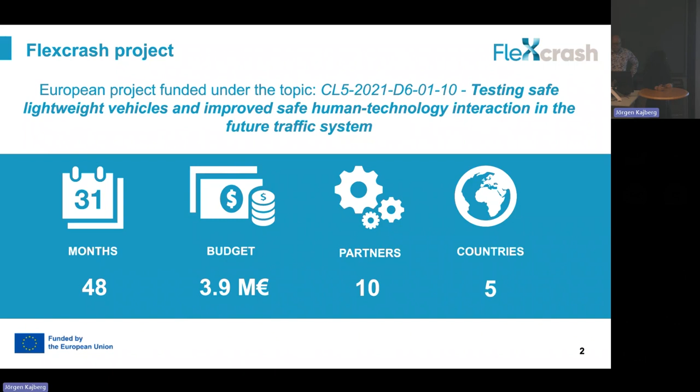So just a brief overview about the project. As I said, FlexCrash has been funded under the topic D60110, that is testing safe lightweight vehicles and improve safe human technology interaction in future traffic system. Our project is a 4-year project that received almost 4 million in funding, and our consortium is composed of 10 partners coming from 5 different countries. So here you have an idea of the structure of the main stakeholders involved in the consortium. We have 3 research centers, 2 universities, 3 industries, and 1 industrial research center that are really driving our decisions in terms of selection of technologies and materials, and 1 standardization body as a support.

So what is the motivation behind our project? First of all, we are trying to find more sustainable and lighter vehicles. Why? Because we need to support and to meet the greenhouse gas emission target of the European Commission, that is the reduction of 30% by 2030. But making cars lighter is super important, but we need also to make sure that they are also safe. And everything must be aligned with the European policies, mainly the Circular Economy Action Plan and the European Green Deal.

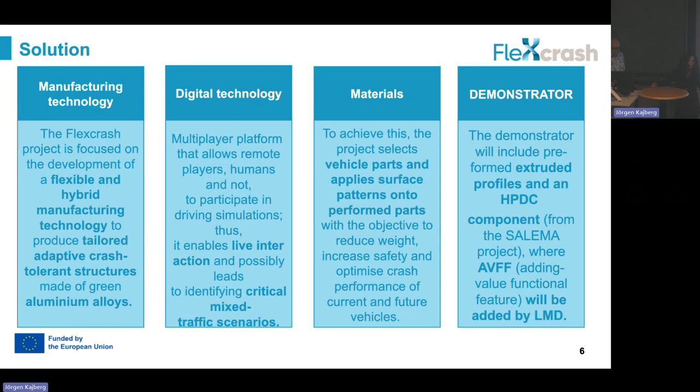So here you have the FlexCrash ambition. As I said, we want to develop low weight and circular cars, keeping safety and the reduction of injuries due to crashes, and also meeting the EU goals on zero emission. So what is our solution? Here I divided it into four main areas. The first one is the manufacturing technologies. Then we are also approaching digital solutions. We are working on materials, and we finally validate our developments in a demonstrator.

So speaking about the manufacturing technologies, here we are proposing flexible hybrid manufacturing technologies that support us to create tailored adaptive crash tolerant structures. Here, we use the pre-formed extruded profile and the high-pressure die casting component that is coming from a project that will be presented in the second session. And the added value functional features are added by laser metal deposition. Here you have a screenshot of our production process in Eurecat, and also a brief explanation of the additive manufacturing process.

So we are also proposing digital technologies. Here we have an online platform that allows different players to interact live, and this supports us to identify critical mixed traffic scenarios that can come in the future when we are going to bring lighter vehicles together with our

current ones. Materials. As I said, we want to make the cars lighter, so we are going for aluminum-based alloys. So here you have three different steps, because we are selecting aluminum because it's lighter, but also because it can be recycled. So when we are going for recycled aluminum alloys, we go for three different steps.

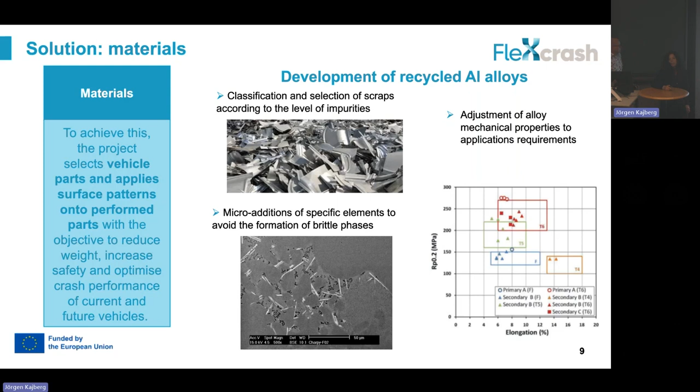So that's the selection of the different aluminum scraps, then the addition of specific elements in order to avoid the formation of brittle phases, and finally the adjustment in order to hit the mechanical properties that are needed for our scope. And here you have our demonstrator.

As I said, it is based on a pre-formed extruded profile that comes from SALEMA. And here we add by laser metal deposition some specific features, and our main scope is to make it lighter and also capable of responding to the crashes that we are testing.

So the project phases are mainly three. The first one is to collect the crash information through the platform that we have been creating. In that sense, this helps us to understand exactly which will be the most probable future crash. Then we are going for the development of the different materials and technologies. And finally, we will have our validation phase.

We are currently in our first year and a half, so the first reporting period, and we have already finalized the first phase, and we are already working on the second one. And we are happy to share today all the different details of the different topics I've been speaking about today with the next speakers. So thanks a lot.

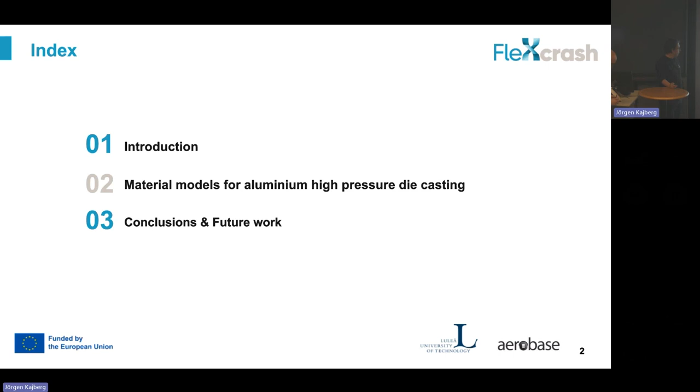And we're gonna talk a little bit today about advanced material models for crash scenarios. So I'm gonna start off with a brief introduction, and then Daniel is gonna take over with material models for aluminium high pressure die casting. And we're also gonna give some conclusions and future work in this project.

And this, of course, negatively impacts the European long-term climate goals. So we want net zero greenhouse gas emissions by 2050. And the transport sector is basically the only sector that hasn't reduced its greenhouse gas emissions since 1990. So this should be a huge focus area.

And also electric vehicles have these very sensitive batteries that you don't want to break, because you get really nasty fires. So lightweighting is still necessary, and we of course don't want to compromise crashworthiness. And here in the FlexCrash project, we use aluminum alloys, such as high pressure die casting, where you cast large lightweight parts, and extruded aluminum, and then you can use additive manufacturing to allow for low weight and optimize crash resistance by locally reinforcing critical areas.

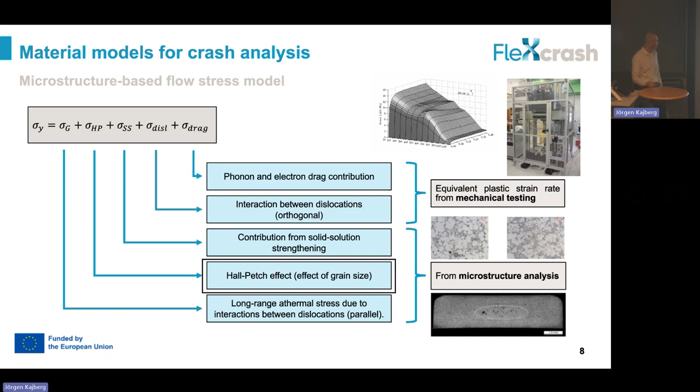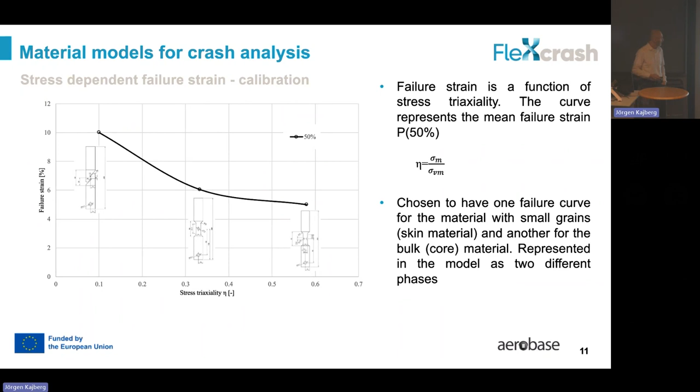So you need to create these failure curves. This represents the failure strain at that current stress triaxiality. And you need to take into account the microstructure. So in our case, it will be different on the outer layer of the component and in the internal part of the component. And another challenge is the variation in failure strain that we need to take into account.

So our hypothesis is that when you calculate your failure strain, because this is dependent. In a crash analysis, you don't have a constant stress triaxiality. It will vary, so you need to take care of that. But we do that, you can say, linearly.

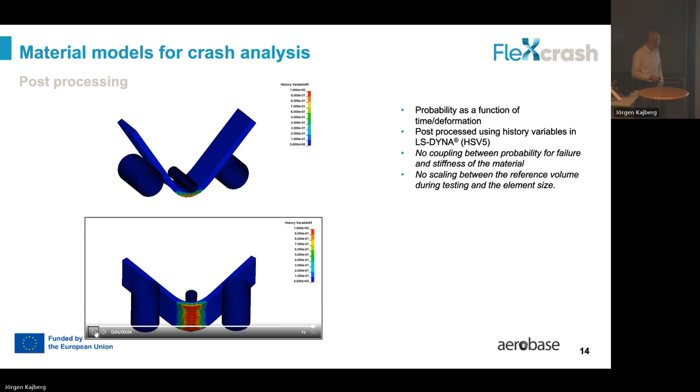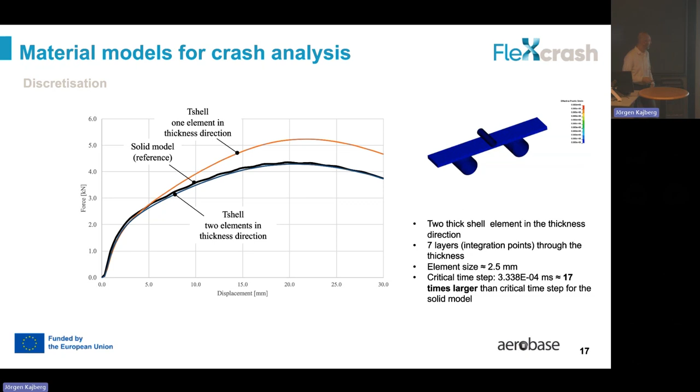Of course, when you do this discretization, you need to be accurate. So this example shows the force versus displacement. And as you can see, with one T-shell element through the thickness, we cannot really resolve the force displacement result. But with only 2 elements in the thickness direction, we can get approximately the same behavior as with the solid model. So if we talked about AM in the introduction, you can also introduce AM structures in this; we also propose here to use these thick elements for that.

So if you look at some of the conclusions, the probability model has been implemented. You need to include the stress state dependency. The standard deviation at different stress states can be taken into account. Thick shells are very efficient for this kind of structures, and we think 2 elements is enough through the thickness. And the next step and future work will be calibration of this model. So I think I will stop there.

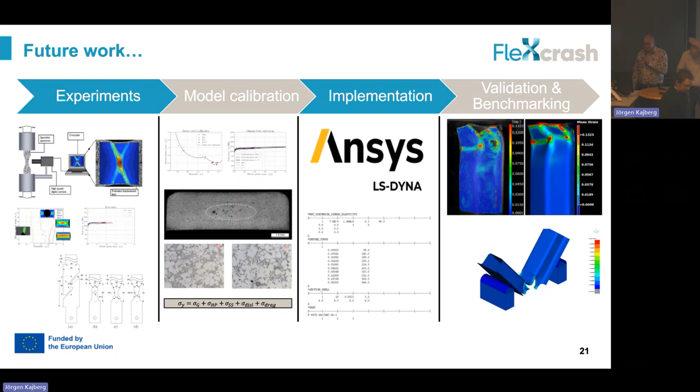So here today we will see the different techniques that we developed and that we will use in the FlexCrash project to characterize the materials in different situations, in case of durability, but also crash. So the main idea is to have different tools to assess the behavior of these materials, to design and also to select the best material for each application.

So the main structure of this presentation will be like, we will first address the vehicle lightweighting, so why it's necessary to reduce the weight of the vehicle, then the passenger safety, the vehicle durability, and finally the material selection, which strategy or how we can use this knowledge here to select the best materials for each application.

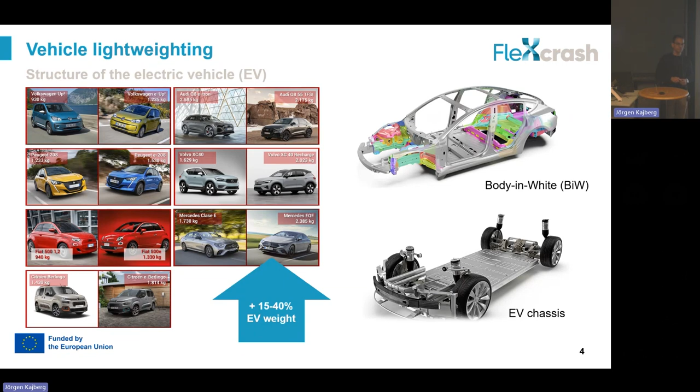So here then we have these different structures. We have the body in white structure, but also we have these chassis components that we can address in order to reduce the weight of the vehicle. So nowadays in all of these vehicles, we have this well-known banana curve where we have all of these different materials, high strength steels that are used to manufacture all of these different components. And I put here an example of the Tesla Model 3 where at least 171 pieces are made of different high strength steels.

But the trend is to use lighter alloys, so aluminum alloys, and also use the technology to reduce such amount of components into two big components, the popular giga castings from Tesla. So in this case, we are moving from almost 200 pieces to 2 pieces of aluminum. And this is not extraordinary. The main trend in the car industry is to use this technology, this giga casting. So you can see here all of the different brands that are using, planning to use, or investigating this technology to produce these vehicles.

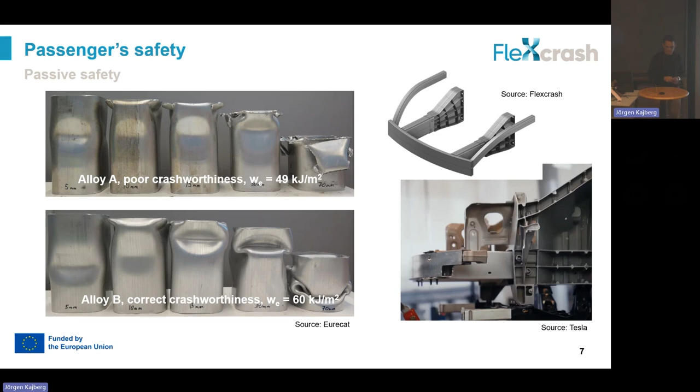And we want this behavior because it is when the material absorbs a lot of energy and we are constructing a much safer structure. And how can we evaluate or identify which behavior we will have? We can characterize this behavior by using the fracture toughness parameter. So here you can see the difference in energy required to crack the material. So then let's see the technique that we have started to use in the FlexCrash project to assess this fracture behavior of the component.

So here we are using this technique, the essential work of fracture, where we are testing different DENT specimens, these double-edged notch tensile specimens, where we have a different ligament length. So the ligament length is the distance between these notches with cracks, fatigue pre-cracks in the notch, and we test them until fracture.

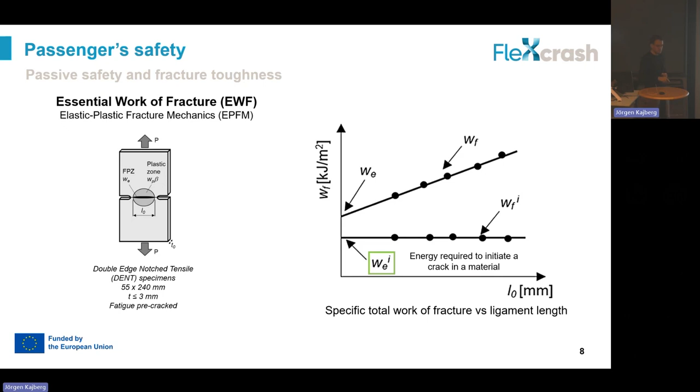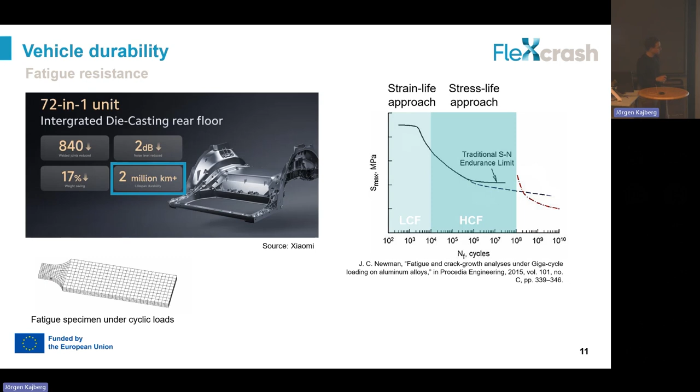And in this case, we have different strategies to select the best material for fatigue applications. The most known strategy is to use this SN curve, where we have different approaches: the strain life approach, where we have huge stresses, the stress life approach, the common one I would say, and the one most proper to characterize this fatigue limit related to a lot of millions of cycles.

And then we have the very high cycle fatigue. That's another stuff. But well, the point is that if we want to characterize or to get this SN curve for a given material, we need a lot of specimens, and also a lot of time, since only one specimen in this regime of millions of cycles takes from days to months.

And in this case, what we propose, and the main idea in the FlexCrash project, is to use this new test, the stiffness method. In this case, what we are doing is by only using one specimen, we are applying different fatigue blocks with an increasing stress amplitude.

And during this test, we are monitoring how the damage is evolving in the material. So we are doing this loading and unloading, and we are monitoring the elastic response of the material, the strain response of the material to a given stress value. So at the end, we can monitor how the damage is evolving from the start of the fatigue damage to the micro crack initiation and propagation, and finally to the macro crack initiation and propagation.

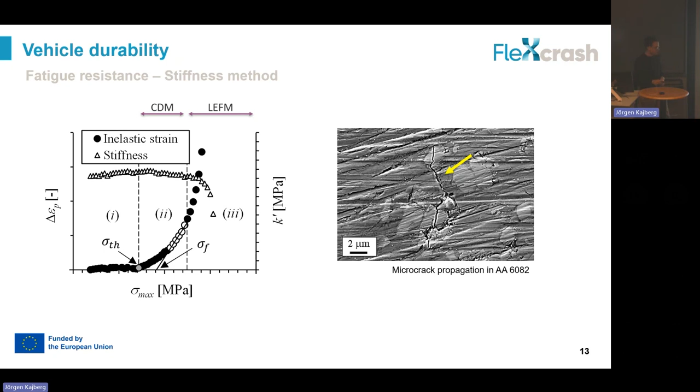This depends on the material, and so the damage tolerance of the material. This is one approach, but we can also use another approach where we define the fatigue limit as the first point that reaches the threshold, defined as 10 times the standard deviation of the first point. So this is just a tool to rapidly assess this fatigue limit value.

Then we can also use the same data, but in this case we are just switching the axis, and by applying these general formulas, we can obtain a first approach of the Wöhler curve, defined by using only one specimen, to get the fatigue limit and a first approach of this curve for these different materials.

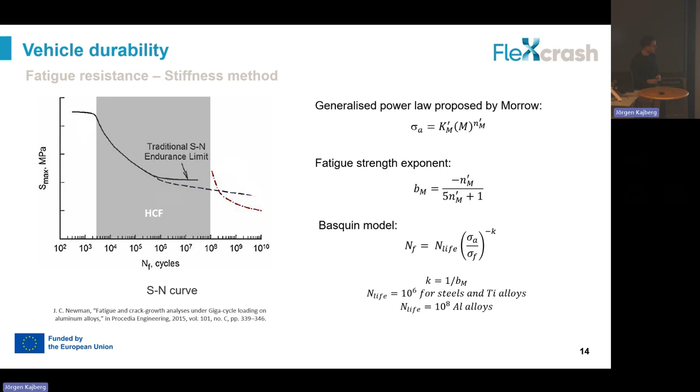And the good point is that this tool allows us to assess the fatigue behavior in a lot of different conditions, with different materials, but also with different features in the surface or different roughness conditions, and then select the best material for each application.

In fact, this is the main aim also of the FlexCrash project, to propose these new techniques to select the best materials for these applications.

So this is all from my side. Thanks for your attention, and I hope everything was clear, and I'm happy to answer questions afterwards.

Thank you. Thank you very much.

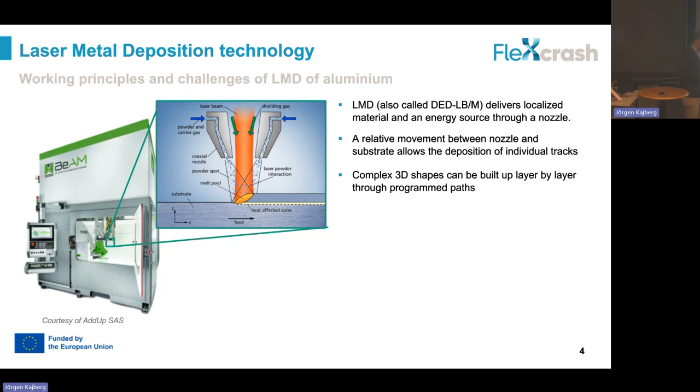Going more into reinforcement structures, of course reinforcement structures are not something new. It's something that is already done, especially in the aerospace sector for many years, because there we need to have high stiffness or high strength components with very lightweight, in order to save fuel to go to space.

Development of the process parameters: in our technology, we have three main parameters, because we need to control the amount of material, the amount of energy that we put into the process, and the speed at which we do this. So the three parameters we want to control are laser power, speed of movement, and the amount of powder that we feed through the nozzles.

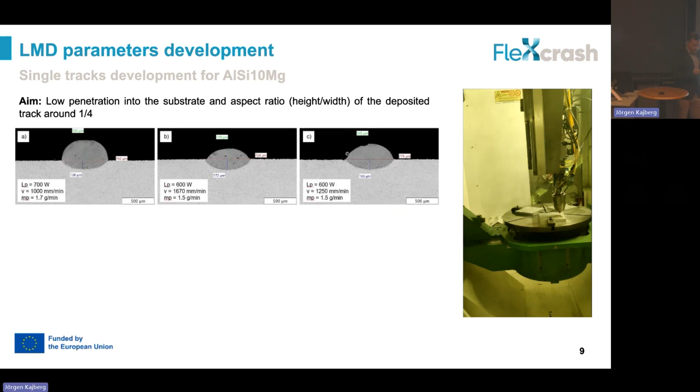From the design of experiments analysis, we can understand the influence of each parameter on the shape of the tracks we deposit. You can see we have a very different impact from each of the process parameters on the shape. For example, speed and amount of material fed through the process have a strong influence on the height of the track, while the laser power has mainly an influence on the width of the track. But very important for this project is the amount of substrate material that we remelt to create the melt pool on top.

Working with aluminum is quite challenging because when we deposit single tracks, everything looks fine and we have nice depositions. But when we try to build higher walls, aluminum has a very high tendency to overheat. This creates balling effects, where the molten metal solidifies in this type of balling along the deposition of the track. Also, due to heat accumulation, the melt pool takes a longer time to solidify, so the molten metal has more time to spread, ending up in wider and thinner layers every time we deposit.

With the close-up of the deposition, we could notice already from the beginning that the first track we deposit on the substrate is quite thin, but from the second track on, we had this effect of the tracks getting thinner and wider.

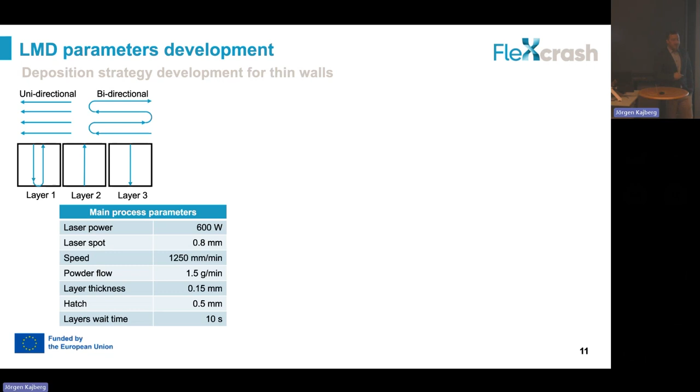So we went further to optimize this, trying to have this pyramid shape at the base of the wall that we deposit. And we found out that the best strategy is to have 3 tracks in the first layer, 2 in the second one, and 1 further on.

In order to be able in the future to design not only single walls, but also crossing walls, where maybe from the simulation we will see that this type of crossing walls can achieve a higher energy absorption during the crash of our components, we also have to optimize the deposition strategy when we have this type of crossing walls.

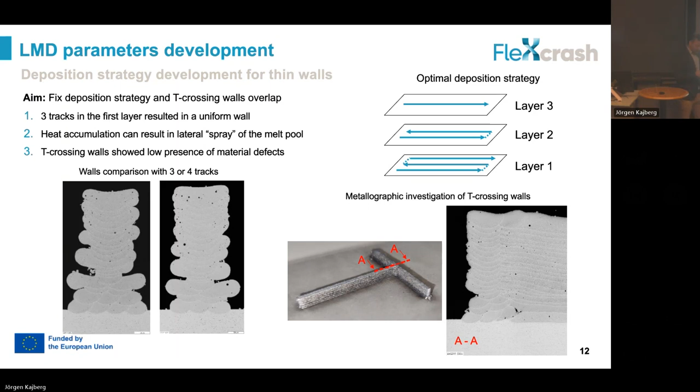So the last step and what we are currently working on in the project is the specimen manufacturing, as it was presented in the presentation before, and the first trials that we are going to test to characterize the material we deposit. So now we used 1.5 millimeter thick substrates. And here, as you can imagine, it's really important what I said at the beginning, to control the amount of material from the substrate that we remelt, and to avoid cutting or going through the thickness of the material. And our aim now is to test this material with a 3-point bending test.

Therefore, in this case, we cannot deposit samples following standards for material testing, but we more or less have to create our own testing strategy to characterize the material and have the material properties that will be used in the simulation to get the final shapes that we want.

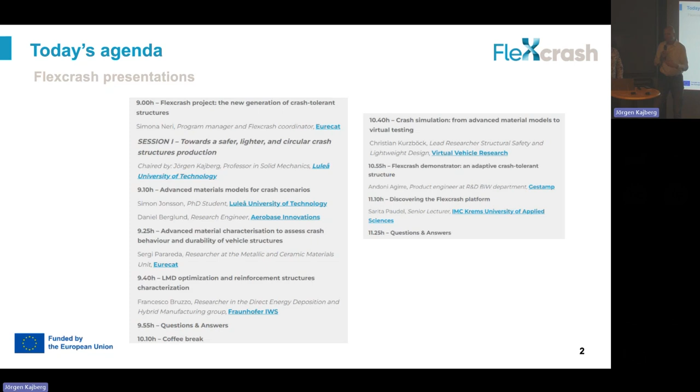Just to add also about the model itself, why have we developed a new model? One reason is that we need to have it microstructure dependent, and in the future we will import the initial state from maybe a CFD analysis. So we have the pore density. We get the variation of that, because now we test the material only with a certain defect density. So when that changes, you need this mapping.

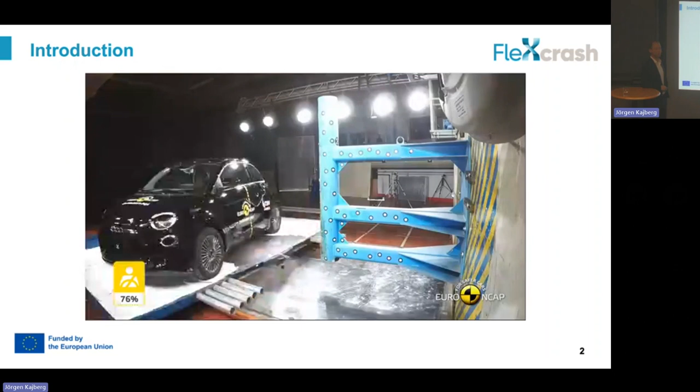So this is our daily work, crash testing, different cars, different scenarios. And now a question for you. What do you think one of these tests costs, one scenario with one car in the real world? Any suggestions? 100,000, 500,000? One of these tests costs up to 1 million euro for one scenario, for one car.

And car manufacturers all over the world have to fulfill a huge amount of different tests, approvals, and certifications. So when you want to bring a new car to market, you have to pay a lot of money just for testing. That's what we are working on, because we want to reduce these real tests in the development process and get a virtual validation, virtual testing, and in the end, a virtual homologation of the whole car.

So why are we not going fully virtual? Actually, it works. We can simulate, we can predict the behavior of different materials, of different components, up to full vehicle simulations and full vehicle behavior in different crash scenarios. But the first starting point is what Simon and Daniel mentioned before in their presentation. We have to understand the materials.

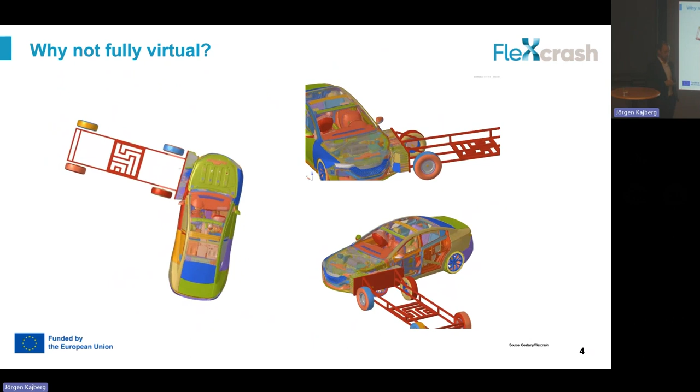So we have to know what the material is doing in certain load cases, in certain crash scenarios. So we are typically starting with Young's modulus, with density, with the base material properties. Then we are adding some stress strain curves, some plasticity. So that's the base work, for example, for metals and for different alloys. It's quite easy. The next step would be to add some strain rates. Different materials have different strain rates, so we have to add them to predict the crash behavior in different load cases.

The next step would be failure and damage from the material and also from connection points. So connection between different materials, different connection technologies. There are up to thousands of different connection points in a virtual simulation. And you have to predict every single point correctly to predict the crash behavior and the energy absorption correctly.

And the last step that we are working on actually, and also in FlexCrash, are these production-related properties. Especially for high-pressure die casting parts, the production process massively influences the material properties. And we have to predict these material properties and the behavior of these properties in a certain crash scenario.

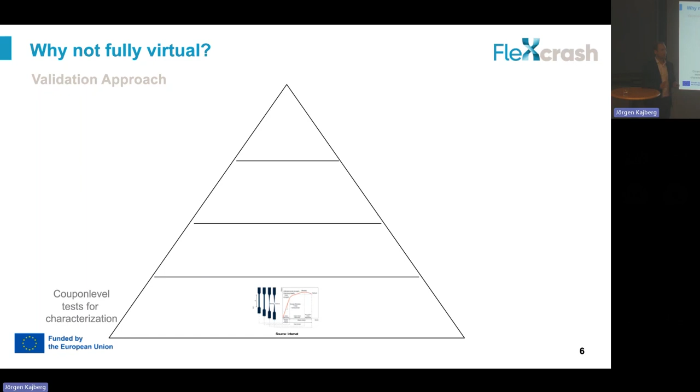So how are we doing that? We are starting at the base level, coupon level testing for characterization. Some of you know that. You test some coupon levels, you get some data from that. You use that data to validate your material models. You fix some issues. In the end, you have a material card you can simulate on component level.

So with this component level, we are going into more complex testing situations. We validate our material cards. When we have some issues with the material cards, we can go a step back to the material model calibration, modify in certain ways, use another material card, use other methodologies, other element formulations, and try to modify our simulation purpose and get a new model on the component level.

And after we have fixed all these issues, we can use that material card in a full vehicle validation. In a full vehicle validation, the complexity is increasing quite high. So we are reducing tests and we're using even more simulation for that. And what we are trying to do is to enhance the forecast quality with every step to predict the behavior of the full vehicle in different crash situations, crash scenarios.

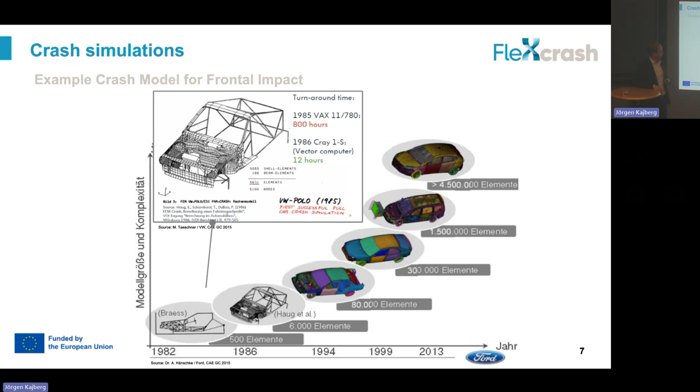And typically, we are using for these full vehicle simulations shell elements from 3 to 10 millimeters. But for these high pressure die casting components, we are going typically to solid elements with element lengths of about 3, perhaps sometimes 2.5 millimeters, to reach the given time step from our project partners.

So what are the requirements for these full vehicle simulations? It's not only the material card we are working on, we also have some other issues in the full vehicle simulation. We have airbag deployments, we have inflated tires, which have to be simulated correctly. We have connection failure. I said before, more than 1,000 connection points in a car, which have to be predicted to give the right energy absorption and the right deformation of these crash areas.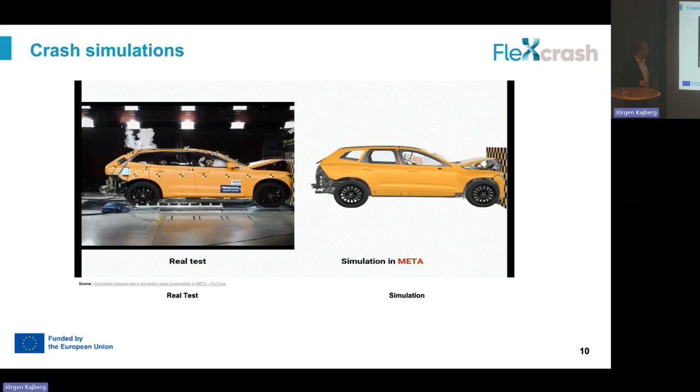But what we also do in FlexCrash and in other projects is to go from this quite defined scenario to new crash scenarios. So this is also one point in FlexCrash. We want to define new crash scenarios for future mobility. And this could be, for example, turning accidents or real world testing, where we have two different cars moving and crashing. So it's quite difficult to really test that on a test bench, because when you have two moving cars, it has to be defined exactly where they hit. In the simulation, it's quite easy. And when we are predictive enough, we can virtually test, virtually validate, and in the end virtually homologate cars and are no longer restricted to physical tests in the real world.

So to summarize the requirements: we need credible and reliable models. We need a standardized procedure for how to document these results in different solvers, in different material cards. Everyone has different internal papers on how to model such things, and that has to be standardized. What are the benefits? Faster product development, cost improvement, higher safety standards when all of these are standardized. What do we need for virtual validation? It should replace real world testing, not all, but most of it, especially when it comes to full vehicle simulations.

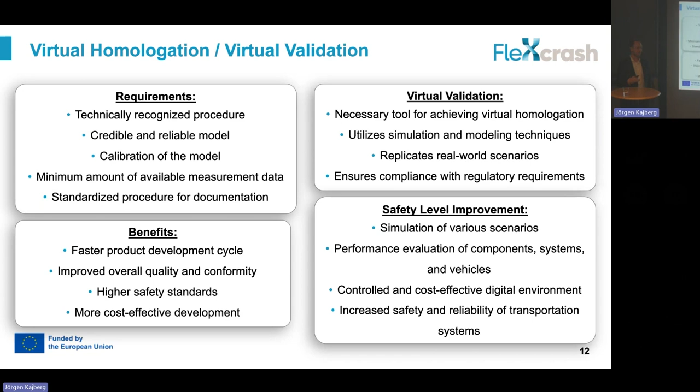And what are the safety level improvements? We can simulate various situations. We can simulate whatever the government, US NCAP, or Euro NCAP is asking for, and you can be sure that the cars will be safer with this virtual testing and virtual validation, because it tests more realistic scenarios compared to the current quite restricted and well-defined crash scenarios.

And virtual homologation, I think, for our company is the right way to develop and manufacture new designs and new cars, lighter cars, and to have more safety features and safer cars in the future for all of us.

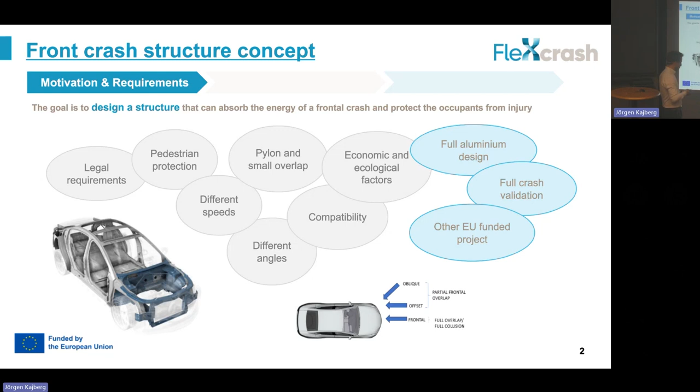Another objective for us was to perform the virtual validation, not only at component level, but also in full vehicle models. So this is another requirement. And finally, since this FlexCrash project is a project funded by the EU, we also wanted to create some links with European projects to create some synergies for the present and also for the future. So we have seen the motivation and the requirements. So then we had to define the tools. What are we going to use to define this demonstrator?

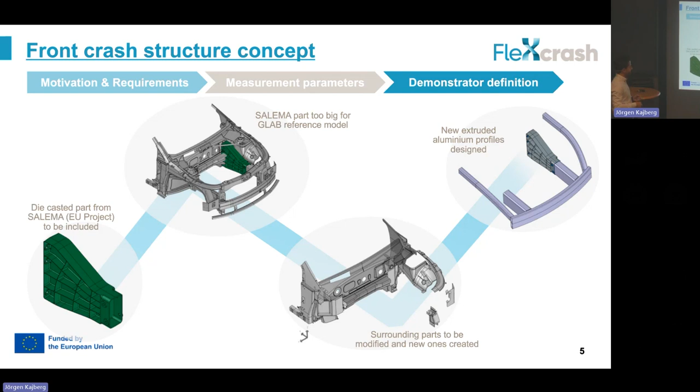So we put together this design, and we saw that it was not working so well. This is something we could expect, because usually when you design for crash, if in the first iteration you have a good performance, it means you have been quite lucky. So unfortunately, we weren't so lucky.

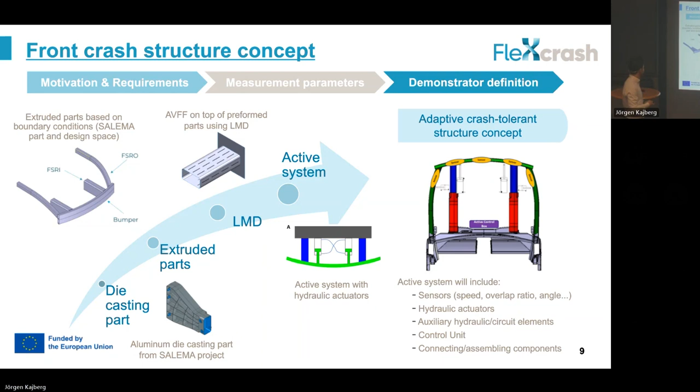My name is Sarita and I'm from CREMS. I'm going to introduce the FlexCrash platform.

The idea behind developing the platform is that developers, regulators, or other interested parties can play around with the vehicles. They can study the live interaction of human drivers and autonomous vehicles so that we can identify critical scenarios and avoid them in the future. The platform implements an online turn-based multiplayer game. It is a web-based application which uses REST API so that we can integrate autonomous vehicles easily with the features using different technologies, and also for scaling - so that we can create many scenarios, simulating many scenarios with many autonomous vehicles as well as human drivers. So this is the idea behind the platform.

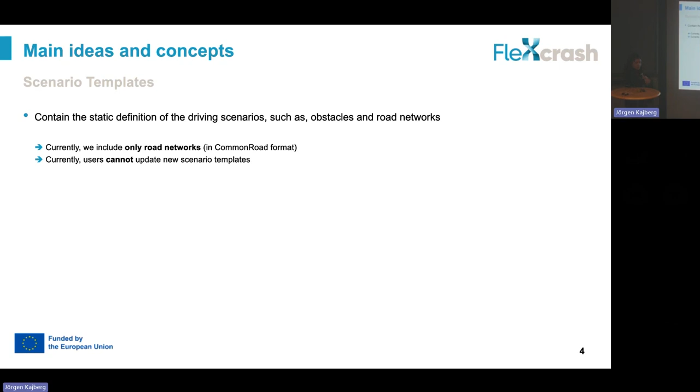After we have this template and create our scenario using it, we then have to drive the vehicles. How long we want to drive the vehicles is defined while creating a scenario. We need to define some time in seconds so that we have simulation steps depending on the time provided while creating the scenario, and we involve one or more drivers or one or more autonomous vehicles. That means we have human drivers and autonomous vehicles in the scenarios. Currently we have only one AV implemented.

We need to have the vehicles and the target of the vehicle - where does a vehicle want to reach? With 2 lanes, we need to keep vehicles in both lanes so that they want to reach in the opposite direction. We have some positions, rotations, and speed. From an initial state, we can control these parameters so that vehicles have a destination target position, and we want to drive the vehicles without colliding, staying within the road rather than driving off it. The platform then maintains the state of the driving scenarios and monitors their execution.

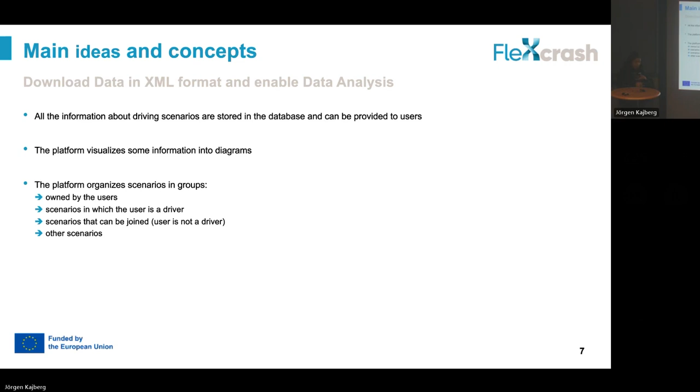First you log into the platform, then you create a scenario, or if one already exists, you can join it. As I said, if you create a new scenario, you're not automatically in it. To be assigned to one of the vehicles, you need to join the scenario, and that means you're now able to control the vehicle.

That means you can accelerate the vehicle, decelerate it, move it left or right, change the time, and so on. There are several features and commands you can click, and with a click you can control the vehicle using different parameters. To drive two vehicles in a scenario, at least two of you have to join the same scenario so that two of you are controlling two vehicles in two lanes in different directions.

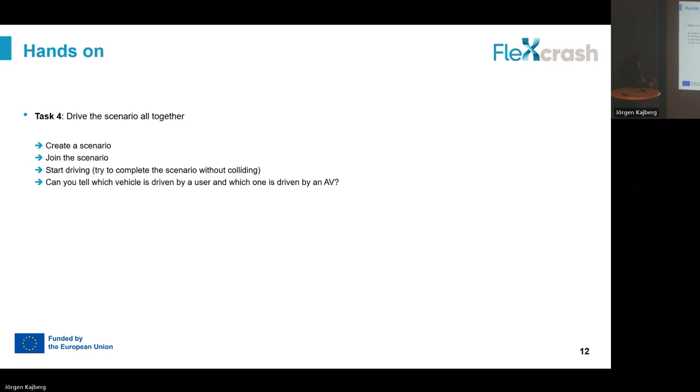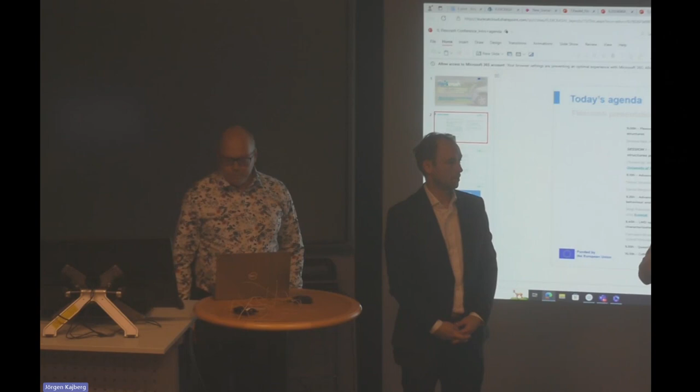We will have more details afterwards, because the Salema project will also be presented later on. But what is clear is that it was not adapted for this CD segment that we have in G-Lab, because it was a big part, considering that we were not integrating the shock towers. On shock towers, we can have big parts in die-cast aluminum in the front unit, but in this case, it was too big.

And it was also not designed for crash purposes. It was designed for durability, not for crash. And that was one of the actual working points: we are trying to get it used for crash scenarios, because it was way too stiff and it doesn't absorb any energy.

Thank you. Then I have a question myself, maybe to both of you. You had a slide showing how you could increase the capacity when it comes to modeling. It increased more or less exponentially. We have some young people here, and let's say within 5 years they're becoming engineers. What could they expect? What is possible within 5 years?

It's a tricky question, especially regarding model size, and also a huge point actually is AI capacity for modeling and for virtual validation. So how can AI and ML influence future car generations, and how can they help us improve crash safety and lightweighting? I think the number of elements is actually not improving like that over the last 20 to 30 years, because capacities on high performance computers are limited.

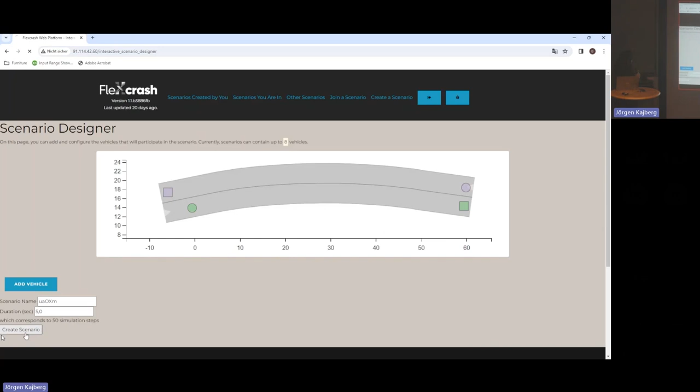For the green vehicle, which has a human driver, this is the starting point, and that is the destination. Similarly, for the other vehicle, which is AV, the speed is controlled, and 5 seconds is there. So once the scenario is completely generated, it is joined, and now you can add the different parameters you want, to decelerate, to drive less, and so on.

So it's computing and calculating the trajectories. So here the parameters are submitted, and once the other user also submits similar parameters, then they can drive. So you can see here it is updated, and the steps are done there. They are active, they are pending, so the simulation steps are automatically updated, so you can drive the cars.

So at that time, please do not refresh the page. It is automatically updating the steps, so we can see the states of several simulation steps are changing, and even now you can see the parameters which are used to control the vehicles are changed, and it is automatically refreshing the page and updating the states.

So it was 5 seconds. So in this simulation, there will be 50 simulation steps. See the steps here, they are generating and they are becoming active. So once it reaches 50 steps, then we can drive the cars. So it takes some time. So there are 50 steps. You can also click on the right arrow so you can see whether they crash.

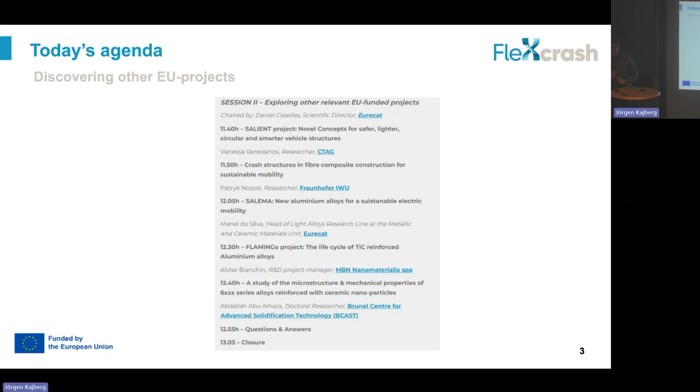It's time for Vanessa Ventosinos, researcher from the Automotive Technological Center of Galicia, to explain what the Salient project is. Hello, everyone. Can you hear me? Yes, we can hear you. Great. So let me share my screen. Put on presentation mode, please. Yeah, sure. It takes some seconds of delay, Vanessa.

Go ahead. Perfect. So first of all, thank you very much for the kind invitation to present the sister project, Salient. As you probably know, a couple of years ago the European Commission detected some challenges regarding safety. In fact, they launched a call to ask for new projects to address those challenges. So these are extracts from the topic, from the call.

They detected that new structural concepts need to be designed from a circular approach. It's always important, but in mixed light material structures it's a particularly high challenge to go for this circular approach in terms of recycling and even refurbishment and reuse. They also remarked that lighter vehicles, which are needed to reduce energy consumption, also mean an intrinsic reduction of safety when they collide with a heavier counterpart. So we should go for lighter vehicles, but we should also address this lower safety.

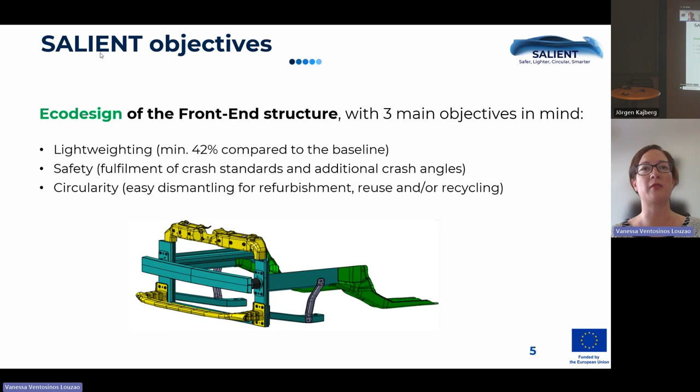So to do so, we consider advanced materials such as aluminium, hybrid structures, and thermoplastic reinforced with carbon fiber parts, made of tapes, that include shape memory alloys in order to be active. So considering those innovative materials, this is the workflow that we have followed to reach a design.

First of all, we perform a constraint analysis. The new materials, of course, have limits in terms of manufacturability, in terms of design freedom, and also in the potential crash behavior. The collapse of a thermoplastic fiber reinforced component is not the same as an aluminum one, let alone a steel one. So we have to be very careful analyzing such constraints and design something that is feasible, that is manufacturable at the end. In parallel, we also perform eco-design assessment on the different versions of the design, on the different options for the front-end structure. I'm going to explain further details on that later on.

And with this first assessment, this first analysis, we design different options for the front-end structure. And we perform a CAE analysis to check through simulation that we fulfill all the requirements with different crash scenarios. And we analyze that at component level, but also at full vehicle level, just to be sure of the impact in the whole structure, in the whole vehicle.

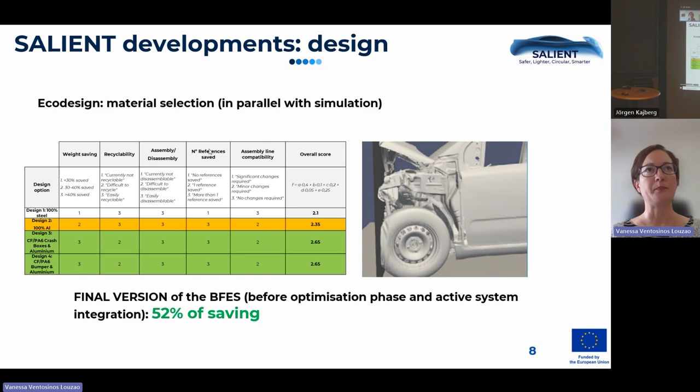But so far, we are talking about a quite traditional solution, let's say. It's still a front-end structure that reacts to different crashes, but without changing its behavior to adapt to different crash scenarios. So where is the smart consideration here in Salient? Well, to this new front-end structure, we are going to add active solutions that are able to adapt the front-end structure to an imminent crash.

It means that the ADAS systems are going to detect a crash that is about to happen, including the speed, the expected crash angle, and so on. And then those active systems are going to take place to adapt the front-end structure to this very specific crash. To do so, we have shape memory alloys included in the crash box, for example, that change the stiffness of the crash box according to that angle.

We are also going to include active tapes that are able to bend the struts a bit, not too much, but a little bit, in order to allow the front-end structure to face the crash angle as well as possible, in order to promote a good collapse of the crash box and the best energy absorption possible.

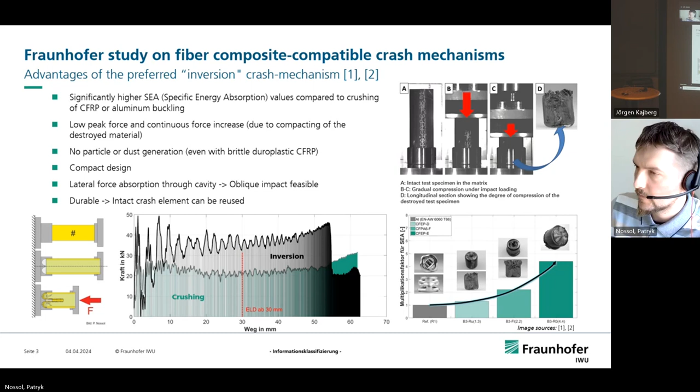Now I'd like to present some of the COSAL project results. The COSAL project was funded by the German Federal Ministry of Education and Research. COSAL stands for Reusable Open Source Design Kit for Electrically Powered Pool Vehicles. Let me start with the goals for our institute in this project.

In general, we want to have more eco-friendly mobility by means of circular economy, new long-lasting vehicle platforms. The main goals for our institute in the COSAL project were reuse and remanufacturing design concepts for a durable sill structure. The sill structure should be designed modular, with the possibility to replace damaged components or reuse intact ones. The focus was especially on side crash protection and a reuse-friendly design.

Here you can see the finalized design for the innovative sill structure. The impact energy is primarily absorbed by the CFRP crash tube using the inversion mechanism. Situated between the cover and the crash tubes, you'll notice an auxetic structure, a special element. It serves as a buffer and also as a force-introducing element. Overall, this design is modular and detachable, a reuse-friendly design.

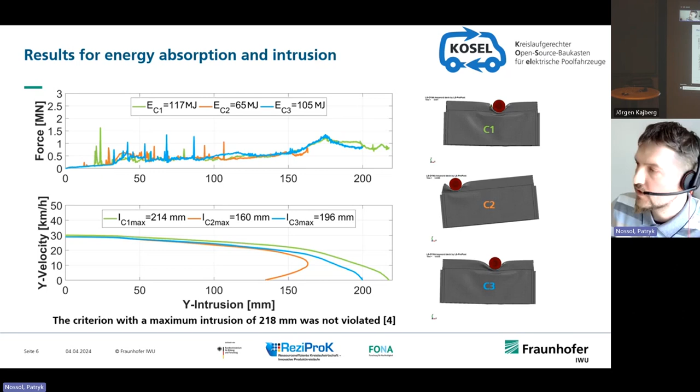These are the results for energy absorption and intrusion for the defined side pole impact scenarios C1, C2, and C3. The criterion with a maximum intrusion of 218 millimeters was not violated, so we've achieved a functional proof for the new cell structure.

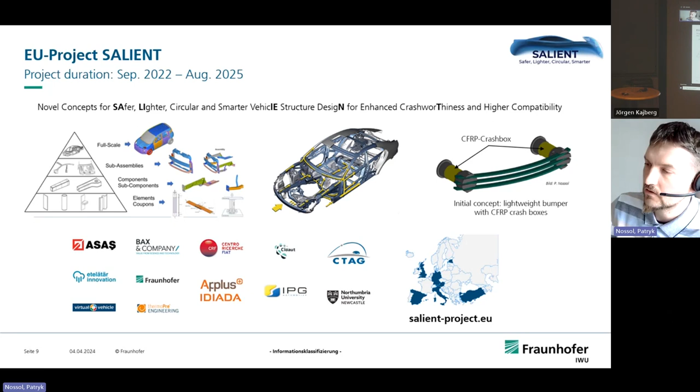In Salient, our institute is involved in structural concepts, design and optimization. Additionally, we will lead the manufacturing of the prototypes, which has already started. As you can see, we have already designed and optimized the new CFRP crash box with an inversion mechanism for a novel front-end module. We can achieve weight savings up to 61% compared to the original steel crash box.

Furthermore, we will manufacture the structure using a winding process followed by performance testing. We are also developing an active system utilizing piezoelectric actuators. This system is designed to move the front-end structure slightly towards the crash partner during an oblique crash, thereby enhancing crash worthiness. Maybe I can show you this development next time.

Thanks, Patryk. Interesting results.

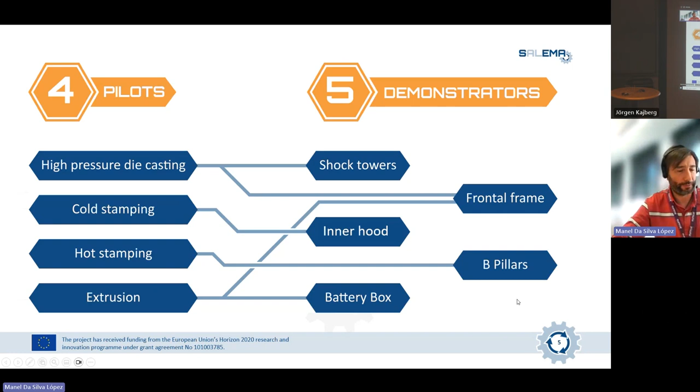There is also a frontal frame produced partially by high pressure die casting and partially by extrusion. It's formed by 2 parts welded together, which are the base for the FlexCrash project shown previously. So that's a little bit the objective of the project and an overview of the structure.

As I mentioned before, we work on 2 different approaches: one is using recycled alloys, and the other is to formulate new alloys looking at the critical raw material content of these alloys. I will speak about both in the next points, but focusing on the development we carried out.

For high pressure die casting, we don't have time to go in detail to all 4 processes, so I have chosen to focus on high pressure die casting.

As I mentioned before, there is end of life scrap, and what we are trying to do in Salema is to harvest, to obtain the valuable part of this end of life scrap and produce high performance aluminum alloys.

Regarding emissions and energy consumption, it's clear there's a benefit to using recycled aluminum instead of primary aluminum to produce the high performance alloys. So to get this good scrap from end of life, what we use is the

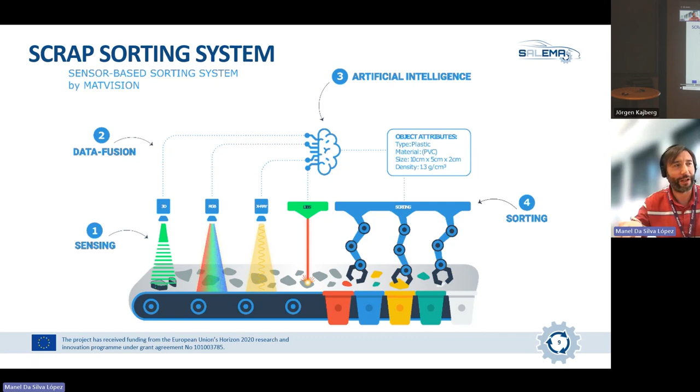So with all this data, it's processed in an artificial intelligence model. With these algorithms, it gives information on the sorting, on the robotic arms, about how they have to pick the piece, and especially, most importantly, in which bin they have to deposit it, so to which fraction it belongs.

So we have this part about scrap sorting. Then what we have also done is to create aluminum high performance, high pressure die casting alloys more robust to this scrap, so that it can be produced easier with a high amount of scrap.

So we have worked on analyzing the actual effect that the impurities of a high performance aluminum alloy have, as can be, well, the most typical, this EN AC-43500, an aluminum silicon 10 manganese magnesium alloy.

What we have done is work on increasing the level of copper that, according to the standard, should be below 0.03%, zinc, and also iron.

One important development we have done in the project is to measure the alloy flowability. We have developed our own test that is currently under standardization. We are currently publishing a CWA from this test, and that has allowed us to predict, for instance, the loss of flowability from some minor additions.

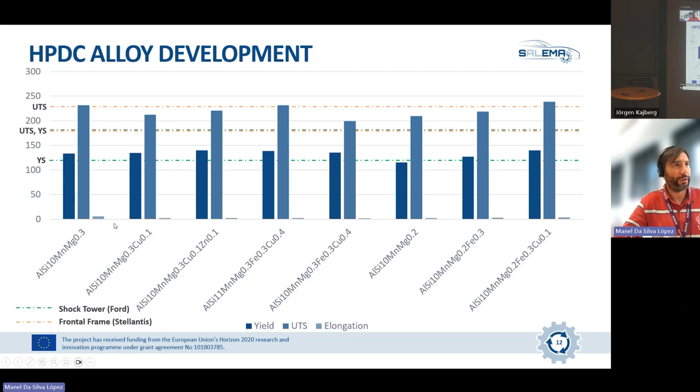Here you have the requirements of our demonstrators, the shock tower proposed by Ford and the frontal frame from Stellantis, from Fiat. We could meet the requirements from the shock tower in terms of yield strength and ultimate tensile strength, even without heat treatment for most of the alloy variants. We had bigger problems with the requirements from the frontal frame, but with a heat treatment we should be able to meet it, and actually we were able to meet these requirements. The main issue was related with elongation, but we are going to deal with that later on.

Unexpectedly, we observed that the heat treatment highly improved corrosion resistance. So a T6 heat treatment will lead to better corrosion resistance compared to as-cast properties, and this heat treatment was much more important than the impurities we have in the alloy. Okay, so that was regarding the development of partially recycled alloys.

I will shortly explain the procedure we followed for formulating alloys with lower critical raw material content. The first thing we did was to go into the list of critical raw materials published by the European Commission, and we developed a way to calculate the criticality of these alloys. We had a criticality index that weights the composition of the alloy and how critical the different elements are, and then we evaluated the castability of this alloy with Thermo-Calc software, by thermodynamic simulation, and in some cases elaboration.

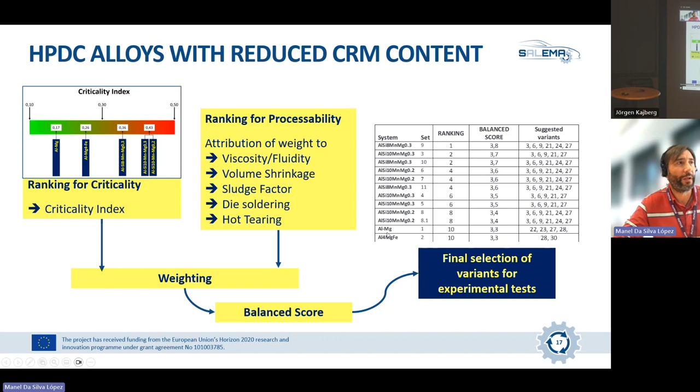So this is the procedure we followed, very fast explained because we don't have much time. What I also want to show you is the results we achieved in 2 of the validations, in 2 of the demonstrators we use in Salema. For high pressure die casting, I have selected the shock tower, the other demonstrator that is not present in FlexCrash.

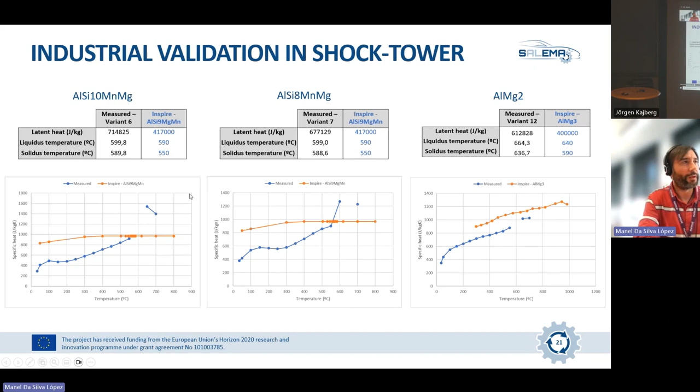Once we had this good result with the benchmark alloy, we moved on to adapt the production process to the new alloys. For that, the first thing we did was to characterize some physical and thermal properties required by the simulation software, in order to have experimental data to fit the simulation software that will provide us more reliable results than just the database data for the benchmark alloy, the standard aluminum silicon 9 manganese magnesium or silicon 10 manganese magnesium. And with this data, we ran our simulations.

We were able to see that, with the reduction of silicon, we will have more issues regarding temperature. So we will need to increase temperature or injection speed in order to have a good soldering here in the back of the part. And also a similar problem we will have with the aluminum magnesium 2 alloy variants. Actually, as was already predicted by Thermocalc, the main issue was hot tearing, cracking during solidification.

And just to shortly show you the results we achieved. With variant 6, a variant produced with about 90% end-of-life scrap, we were able to have mechanical properties close to the benchmark, the standard alloy. The elongation was reduced slightly, about 10%, but we also had a small increase in yield strength. And after the T7 heat treatment, we were meeting the requirements of the demonstrator: 120 megapascal for yield, 180 for ultimate tensile strength, and 10% elongation.

We also tried an aluminum silicon 8 manganese magnesium variant. With that, elongation was closer, so we wanted to try a different approach that is better seen by end users. Instead of a complex T7 heat treatment that requires heating at very high temperature, we went for a short annealing. We tested 2 different temperatures. With the first one at 320 degrees, we didn't see any improvement in terms of mechanical properties. And with the second one at 380 degrees Celsius, we reached the required elongation, but we lost some yield strength that went below the minimum requirement.

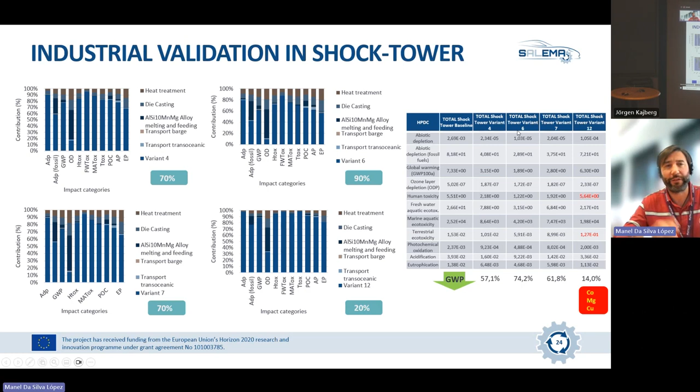We have also taken into account during the whole project the life cycle assessment and the global warming potential of these alloys, and we see that these alloys have a very good potential regarding this aspect. They are much greener than the standard alloy. We can reduce the global warming potential by almost 75% if we are using variant 6, the one we have seen previously that reached all the requirements. So we are pretty happy with the results.

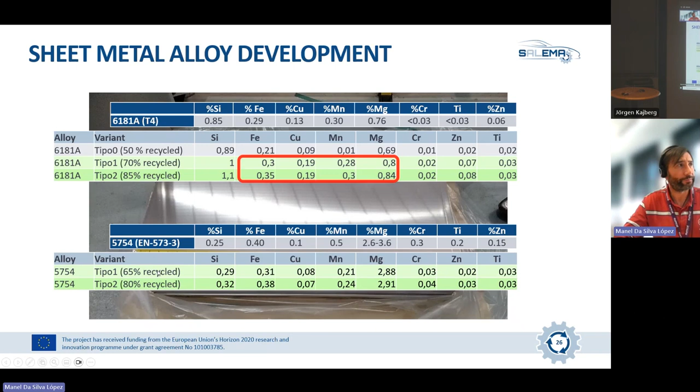And finally, I wanted to explain a little bit about another technology, the research we have done in hot stamping, which we are very glad with. For hot stamping, we tested 2 different alloys: 6000 alloys, produced with 3 different levels of recycled content, and 5754 alloy, produced with 2 different levels of recycled content. In the 6181, in order to reach this level of recycled content, it was necessary to increase the amount of impurities present, mainly iron, copper, manganese. We also increased magnesium and silicon in order to compensate, and also some zinc was increased. The 5754 was possible to produce with a very similar level, just some higher iron was required.

The mechanical properties in terms of tensile test were very similar. So increasing the level of impurities didn't really affect the mechanical properties, whether we were cold forming or hot forming these alloys. But if we look at other properties, such as the essential work of fracture, which was probably presented by Sergi earlier this morning, we observed that for the 5754 there was almost no difference. There was a cloud of points that could perfectly be from the same material.

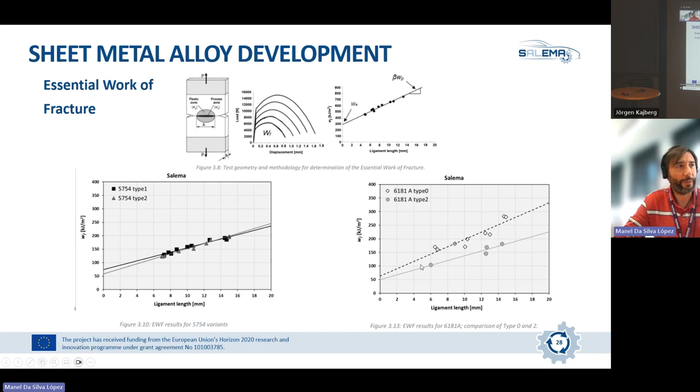So we can still deal with them and work with these alloys, and that's what was done with the data extracted from Eurecat tests and also some tests done by Gestamp, tensile tests at different strain rates and different temperatures, and also these friction tests carried out at Gestamp. There was performed the simulation of the demonstrator.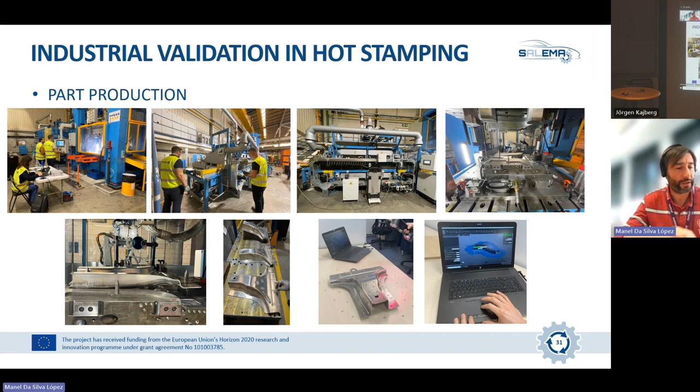But we are very happy with those results. So the shape was fine. In terms of methodology, results are perfect. And right now we are checking the mechanical properties and assessing the performance of these new alloys. And with that, I have finished.

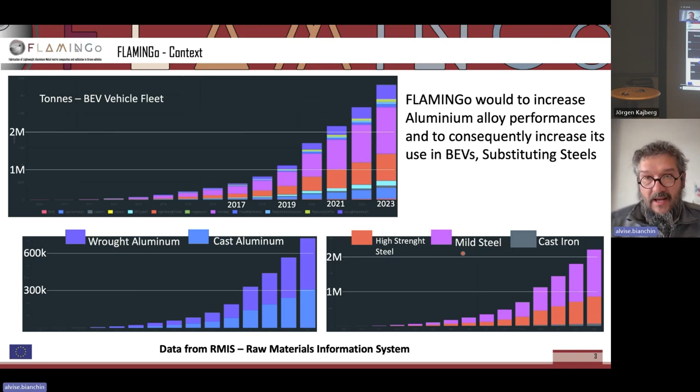Although the wrought aluminum and the cast aluminum have quite different degrees of growth in terms of amount. There is a possibility for aluminum to tap into this mild steel range if we could have an aluminum with the correct and exact mechanical properties.

So one question that we asked ourselves from the beginning of the project is how can we make a stronger aluminum, considering the strengthening mechanisms that are already considered for aluminum, such as the Hall-Petch and the Orowan mechanism. We realized that all these are basically derived from the availability or the creation in the melt of nanoparticles. This is well known, and this is also possible to reach thanks to the direct inclusion of nanoparticles in the alloy. And this produces a similar strengthening mechanism and similar effect on the overall alloy.

So why should we focus on nanoparticles? Well, this could give us the possibility to be less dependent on alloy composition. So as said, also in the Salema project, this has been developed trying to be less dependent on this critical raw material and finding other ways to develop alloys that have good mechanical properties.

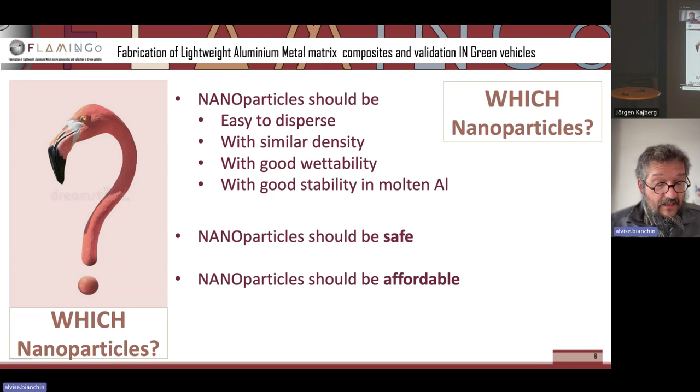Safe for the workers and in all the manufacturing steps. And also nanoparticles should be affordable. Finally, what we should also consider for any material development is that the new material has to be recyclable. So the new aluminum metal matrix nanocomposites should also comply with the current technologies for recycling.

So in Flamingo, we considered a couple of approaches to tackle these requirements that we had since the beginning. One is the use of predispersed and concentrated additives that could ease the dispersion of material and can also resolve the problem of safety, since nanoparticles can be embedded in the aluminum since the beginning. And then to make them affordable and recyclable, we considered since the beginning to have expendable nanoparticles, in the sense that nanoparticles will be lost at the end of the overall process and of their life cycle.

So the life cycle I was speaking about that we have in Flamingo is this one, considering nanoparticles creation in the master batches that are used in foundries to make melt, that are used in DC casting for extrusion, green sand casting, low pressure die casting, high pressure die casting. The component design is obtained also considering topology optimization. And then there is the use of the components in the vehicle. Eventually, the component is recycled, and throughout all the life cycle, we are considering the safety aspect as well as the overall costs and environmental costs.

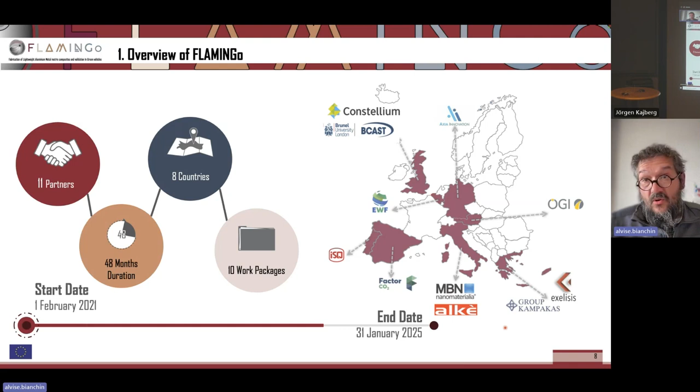11 partners, most of them industrial partners to cover the different technologies that are involved in the project, such as the extrusion by Constellium, high pressure die casting by Brunel University, green sand casting and low pressure die casting by OGI, the manufacturing of the master batches by MBN, the recycling by Kampakas. Beside all these technologies, there are also partners focused on the activities supporting the results, like IP, training, LCA, standardization, etc.

So since we have not much time today, I just want to focus with a couple of slides on the production of the nanoparticles master batches and their recycling. My colleague Abdallah after me will talk more about how these are used for the DC casting and extrusion of parts.

So about the production of master batches, one thing that is related also with safety is that nanoparticles tend to be quite volatile and are generally dealt with in a way that minimizes as much as possible their release in the environment. Beside that, they are also difficult to handle due to their dustiness. A way that we developed in MBN to include them in the master batch is their direct synthesis at solid state by mechanical alloying in the aluminum matrix. And we can reach a concentration of titanium carbide up to 80% in weight. And for the purpose of easing the dispersion in the final alloy, we dilute it to a content of less than 45 weight percent.

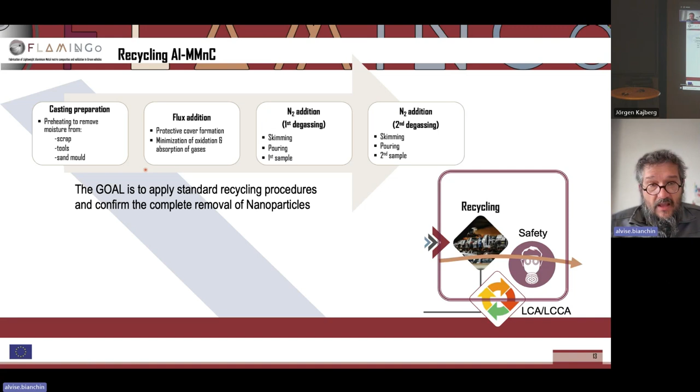So the standard procedure considers an initial melt with the removal of scrap and the flux addition to form a protective cover and minimize the oxidation of the melt, and then skimming a couple of times with the addition of nitrogen in the form of tablets. What we end up with is a billet on which we can perform some characterizations. The two main characterization methods that we used are the hardness test, which is an indirect way to measure if nanoparticles are still there, since they affect a lot the overall hardness of the material.

And this is most effective when we have elements in the nanoparticles that are matching with elements in the aluminum alloy matrix. In the case where the elements are not matching, then we can use optical emission spectroscopy to assess the amount of, for example, titanium, which is directly related to the titanium carbide in the material.

And as we can see, already from the first fluxing with nitrogen addition, these were basically going back to the original state without nanoparticles, further confirming that this approach is quite usable as a strengthening mechanism in the current uses of aluminum.

A few words also about the evaluation of safety. This has been done basically for exposure control during different operations of the nanoparticles introduction: in the first step, the casting, the welding, and now it is being done also for the recycling step. This controls the exposure, so the release of nanoparticles in the environment.

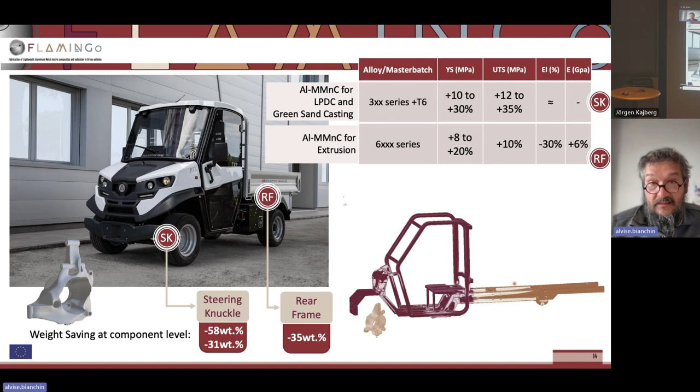Good. So I gave you an overview of the Flamingo project with a couple of insights on the master batch production and recycling, and I will leave it to my colleague Abdallah to talk about some technical details on DC casting and extrusion with titanium carbide. Thank you.

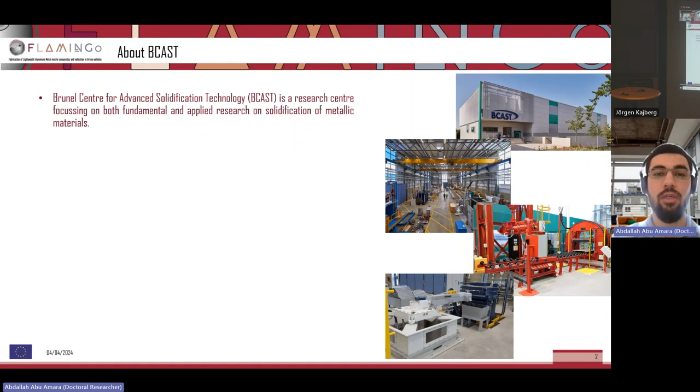Just to start off, I want to give a quick brief introduction to what BCAST actually is. The Brunel Centre for Advanced Solidification Technology, or BCAST, is a research institute, and it focuses on both fundamental and applied research on solidification of metallic materials. BCAST was created in 2002, and it only had a handful of staff and PhD students. But over the past 16 years, it's grown to 85 personnel plus 15 seconded industrial research engineers.

BCAST currently is a dominant research group in its field in the UK and one of the largest in the world. We have more than 4,000 square meters of laboratory space and over £43 million of capital investment. Sorry, I'm just going to put my pointer on. Here you can see images of some of our facilities.

We have an advanced materials processing center. We have an advanced materials casting center, which has an HPDC caster. We have a low pressure die caster. We have some sand casting facilities. And most importantly for today's presentation is the direct chill caster. This is the industrial scale direct chill casting machine that we have. I'll be talking more about direct chill casting in a few slides later on.

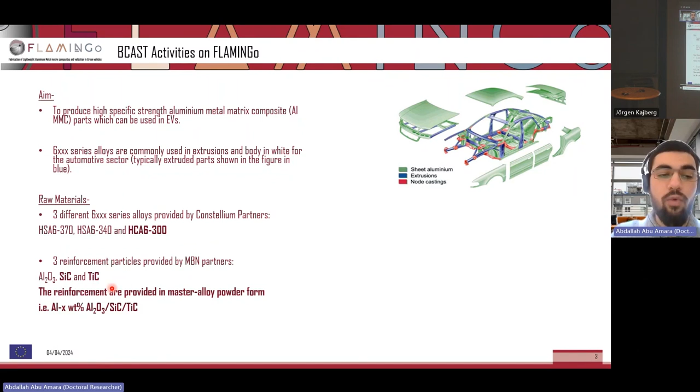This is probably of more interest to you, since the FlexCrash project is focused on crash management systems. As for the reinforcement particles, which were provided by MBN, we were given 3 different types: alumina (aluminium oxide, Al2O3), silicon carbide, and titanium carbide. These reinforcements are provided in the form of master alloys, as Alvis already mentioned. The master alloy is essentially aluminium plus X weight percent of either alumina, silicon carbide, or titanium carbide.

To quickly share the methodology we use to process the materials and prepare them: the first step in our experiments is to prepare them. Essentially we heat the 6000 series alloy to 730 degrees in an electric furnace, then we add the master alloy containing the nanoparticles. We wrap the powder in foil and pour it directly into the melt - this is the powder containing nanoparticles.

During the action of pouring the powder into the melt, we apply mechanical stirring. We have a rotary device connected to an electric motor which stirs the melt, aiding the introduction of particles and their dispersion. The titanium carbide particles have a mean Feret diameter of 1 micrometer, while the silicon carbide particles have a mean Feret diameter of 100 nanometers. The silicon carbide particles are a lot smaller, meaning sometimes we apply different stirring times to get all of the powder in.

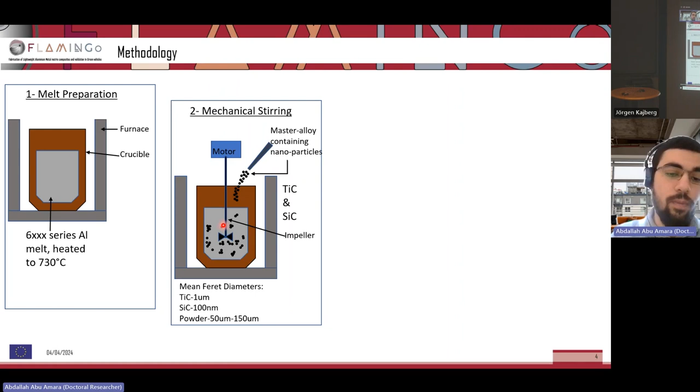The third step is typically ultrasonic treatment - we apply ultrasound waves in this composite melt to produce ultrasonic cavities that disperse the particles even further. We need a homogeneous distribution of particles in the melt to achieve the best mechanical properties. If we have agglomerations or clusters in the melt, that can create weak spots in the material once it solidifies. This is why we try our best to achieve the most homogeneous distribution. We apply the ultrasound for approximately 10 minutes at a frequency of 17 kilohertz.

The next step is the actual casting itself and the characterization. Let's take a look at what that looks like. Once we have the composite melt, we pour it into this keel die, which has this shape, producing these aluminium composite material castings. Once we have these castings, we characterize them using optical microscopy, SEM, XRD, and so on. We can also machine some tensile bars for mechanical testing - it's quite convenient because we have this round section at the bottom of the die, so we can easily machine tensile bars for tensile testing.

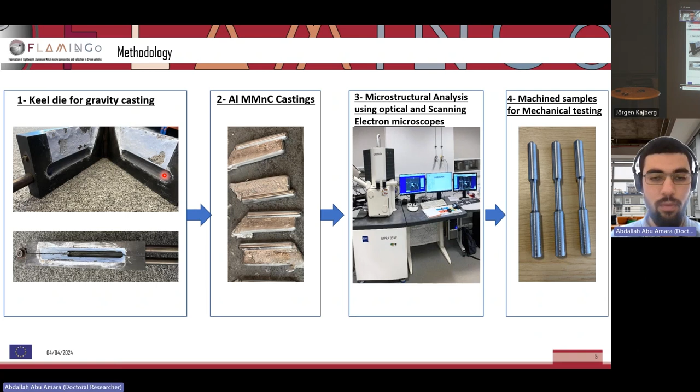And for the silicon carbide, again, we cast the reference alloy, just the HCA6 300 by itself. Then we also added, in this case for silicon carbide, 0.1, 0.3, and 0.5 weight% silicon carbide.

And for each composition, we tested 5 samples in the as-cast state and 5 samples in the heat-treated state after heat treatment.

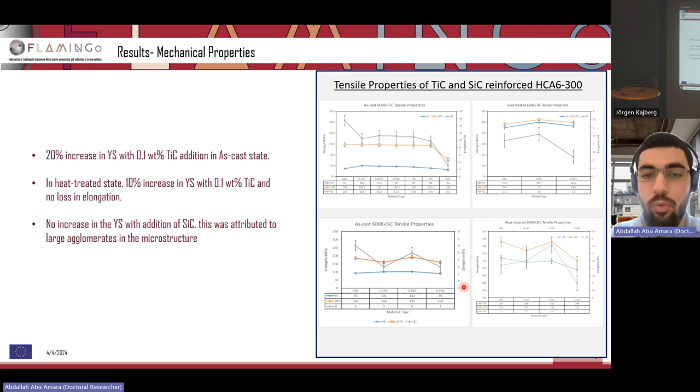With the additions of silicon carbide, we weren't able to achieve any increases in the yield strength, neither in the as-cast state nor in the heat-treated state. We attributed this to the large agglomerations which we saw in the microstructure.

So what does this mean? How does this help in any way? Essentially, what we want to do is take these same principles and results that we achieved with titanium carbide and replicate the methods and results in direct chill casting. Direct chill casting is a popular way for mass producing aluminium, especially aluminium billets for the purpose of extrusion or rolling.

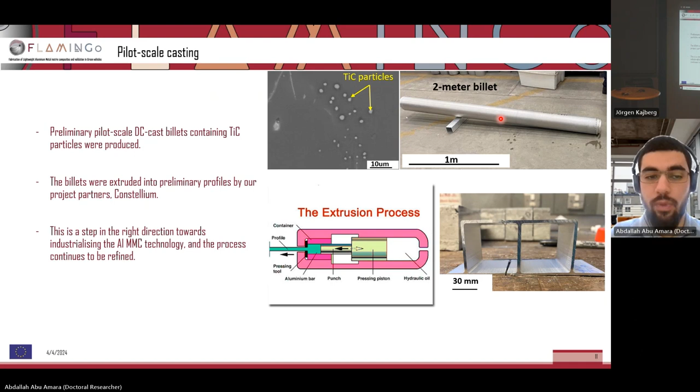To summarize, the following points can be said. Titanium carbide particles seem to be a suitable addition for 6000 series alloys for the purpose of increasing the mechanical properties, and in particular the yield strength. Silicon carbide particles didn't result in the improvement that we saw with titanium carbide, because the silicon carbide particles had agglomerated due to their smaller sizes. Preliminary pilot scale aluminium composite direct chill cast billets incorporating titanium carbide particles were produced, and these were also extruded successfully. This is all in an effort to upscale and industrialize the metal matrix composites technology.

Thank you for listening. I think there is a Q&A session now, I believe.

Thank you. Very, very interesting and inspiring talk. That was really nice results and promising. Now I would like to ask the presenters to be here at the table. Okay, it is not possible. Next time we have to organize it presentially. I think it would be better. But yes, it's time for the questions and answers.